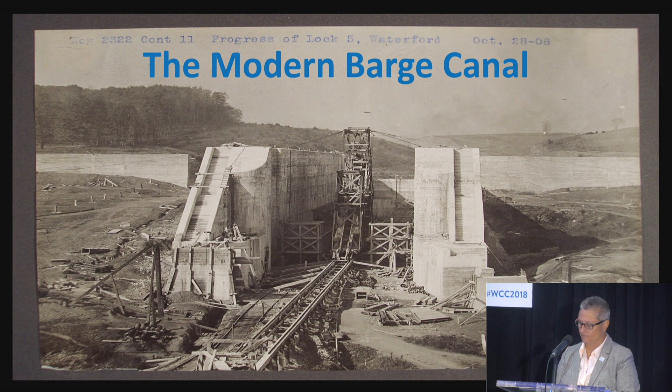The current New York State canal system is comprised of 4 canals, the primary leg being the Erie. Of the original lateral canals, only 3 remain in use today. This current system totals 843 kilometers of navigable New York State inland waterway.

The 57 locks on the New York State Canal system are 91.4 meters long, 13.3 meters wide, and additionally there are 19 lift bridges, 116 dams, 610 water impounding structures, 20 reservoirs, and over 193 kilometers of water impounding embankments. We have an extensive feeder system from those reservoirs for water management.

The New York State Canal system is also part of a network of waterways which stretches south to Florida, north to Canada, and west to the Great Lakes and Mississippi River. So as you can see, for over 200 years, the New York State Canal system has physically changed, adapting to increased commercial use for the economic benefit of the United States.

The peak of commercial shipping occurred in 1951, with over 5.2 million tons of cargo shipped. While there are limited commercial barge operations on the New York State Canal system today, the use has gradually shifted from commercial to recreational. The Canal Recreation Way Commission was created in 1992 to provide a vision for the future through the Canal Recreation Way Plan.

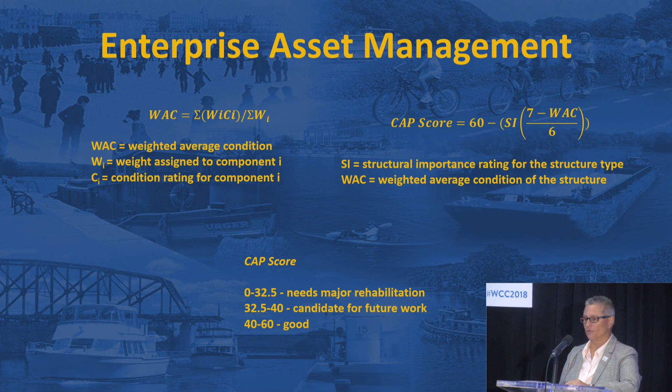Now, under the direction of the Power Authority, a second effort to reimagine is taking place. With the migration to Maximo, which is a configurable, off-the-shelf asset management system, we're now adding work history and historical spending, allowing our analysis on all our infrastructure to be more robust.

The newest development is the addition of a remotely operated vehicle and drone capability to our structural inspection program. That was my best effort at flying the drone. They don't let me touch it.

ROVs can enter spaces too hazardous or confined for inspectors, and the drone is being used with thermal imaging to detect leaks in earthen dams and embankments before those conditions cause a catastrophic failure. All of these changes are assisting our engineers and leaders make more informed, repeatable, and transparent decisions.

Finally, with regard to risk, we've embarked on an evaluation of our vessel fleet to retire older equipment which have significant environmental and safety risks and replace them with modern working vessels. 29 obsolete New York State Canal vessels are being repurposed as part of New York State's expansion of 12 artificial reefs. These vessels are being put into service one last time.

Their legacy will be represented by enhanced fisheries and diving opportunities for generations to come. To date, 7 vessels have been deployed off the coasts of Long Island, with an additional 6 to be deployed this month. This reimagining of decommissioned vessels is a win for vessel enthusiasts, the environment, and the economy.

I'm going to grab a short break here and have some water, or maybe some Irish whiskey, or maybe that's later. So here's a video about the expansion of New York State's artificial reefs with the Canal Corporation as a key partner.

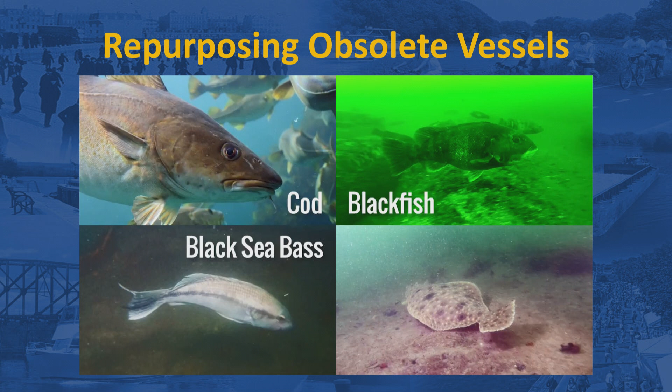It is also an alternative to recycling if you use the right materials. So it's a win-win-win. This ambitious program is providing vital habitat for fish like cod, blackfish, black sea bass, summer flounder, and lobster. New York's Reef Project is being managed by a multi-agency team comprising the New York State Department of Environmental Conservation, New York Power Authority, and the New York Canal Corporation, New York State Department of Transportation, and the New York State Thruway Authority.

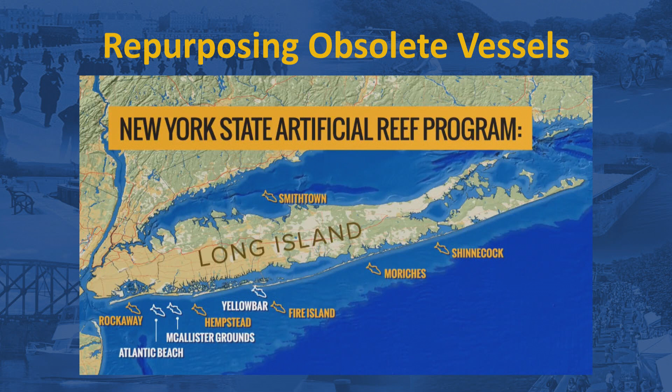We are building at 12 reef sites off the coast of Long Island. This summer, we are developing 6 of the reefs at Rockaway, Hempstead, Fire Island, Moriches, Shinnecock, and Smithtown. Next year, we'll be developing another 6 reefs at Atlantic Beach, McAllister Grounds, Yellowbar, Kismet, 12 Mile, and Matinecock.

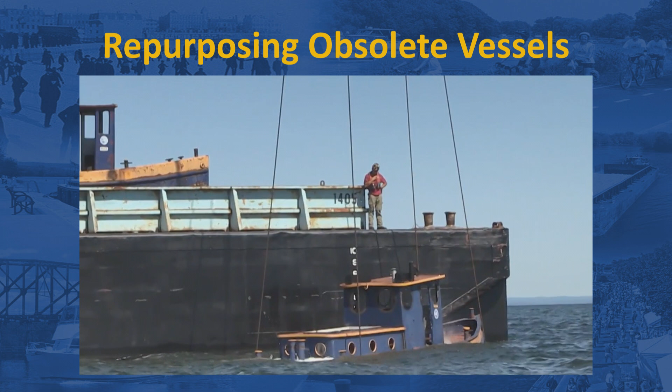We're building artificial reefs using a combination of recycled materials that enhance existing habitats, promote biodiversity, and ensure these marine environments continue to thrive. At each reef site, materials are strategically placed, utilizing the patch reef design, which creates smaller, isolated reef patches that are supported by sandy bottom. Before the structures are deployed, all harmful materials are removed, including oils, asbestos, pesticides, and loose debris.

One of the key factors of these reef projects is that they will generate benefits immediately, providing shelter and foraging areas for fish and other marine life. Reefs that have been put down have been colonized in as little as 2 weeks. Some studies have shown recreational fishermen have been able to take fish off of artificial reefs 2 weeks after their initial deployment.

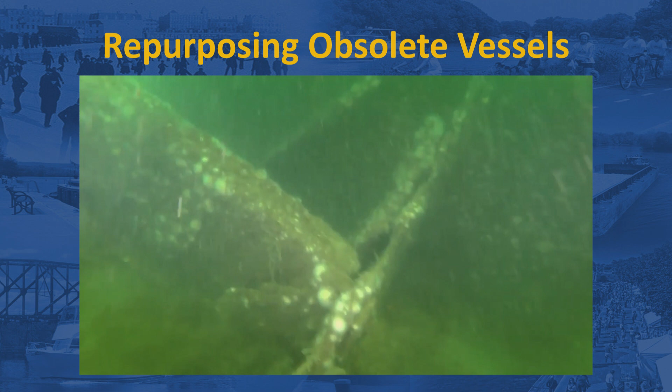These benefits will continue to grow over a 10 to 15-year period as the artificial structures become covered by encrusting organisms like barnacles, mussels, and sponges, creating habitats similar to a natural reef.

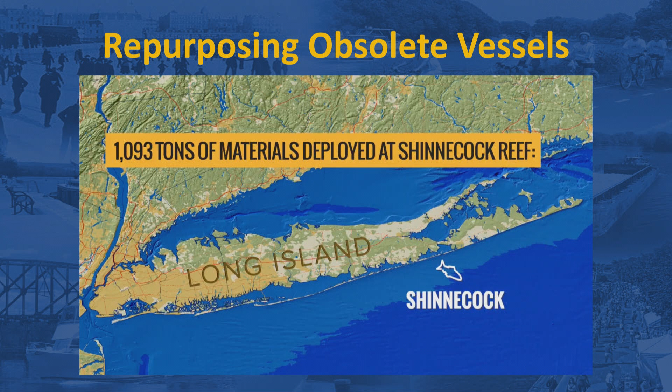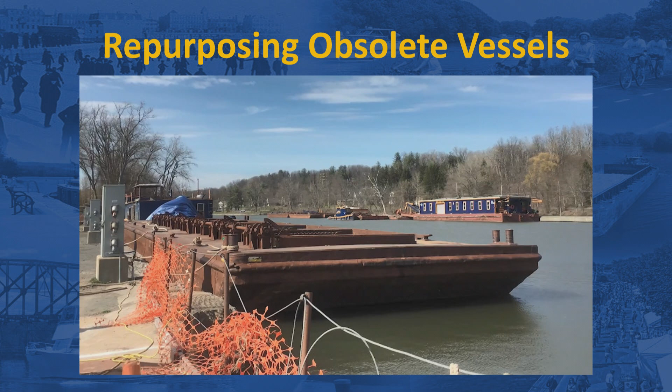On May 31st, Governor Cuomo led the inaugural event at Shinnecock Reef, where 1,093 tons of materials were deployed, including 885 tons of clean, recycled Tappan Zee Bridge steel trusses, roadway deck panels, and steel piles, plus 3 out-of-commission Canal vessels, including a 74-foot tugboat and 208 tons of steel construction materials. As this diving footage of the sunken tugboat shows, marine life, such as black sea bass, are already attracted to this new reef habitat.

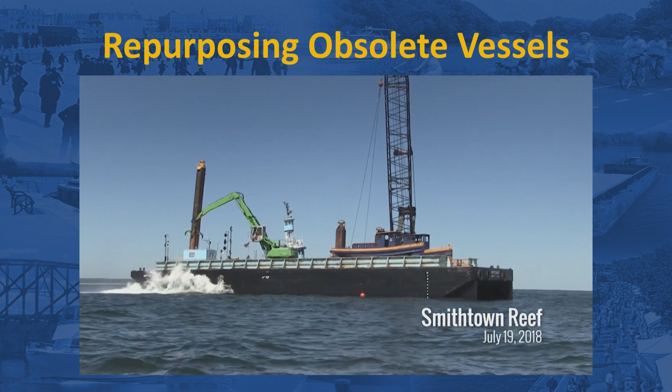More recently, we deployed materials to create a new habitat at Smithtown Reef in the Long Island Sound. Two 40-foot decommissioned canal vessels and 75 tons of recycled steel pipes were sunk at the 3-acre site, which lies 1.6 nautical miles northwest of Stony Brook Harbor entrance.

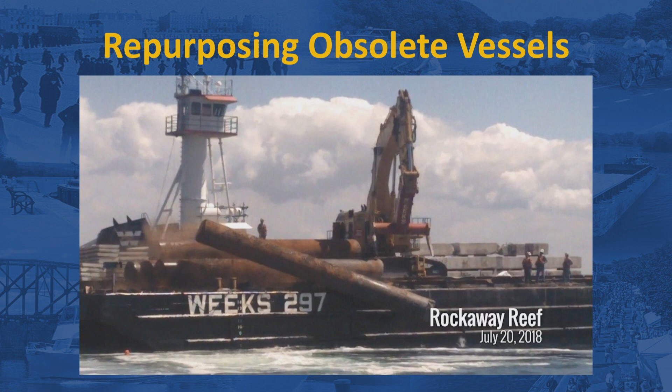We've begun developing Rockaway Reef, which received its first barge full of recycled Tappan Zee Bridge materials this July. More materials will be deployed there in August and September, including a 100-foot vessel.

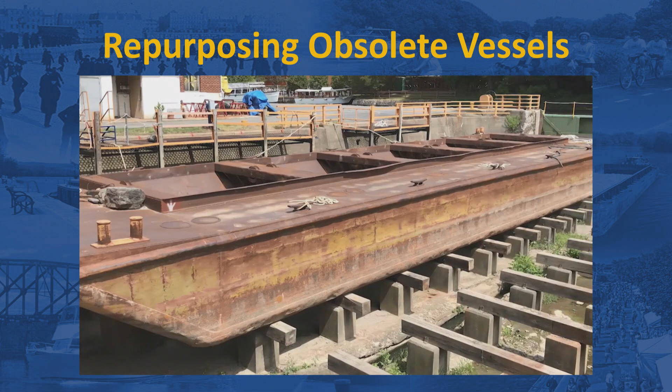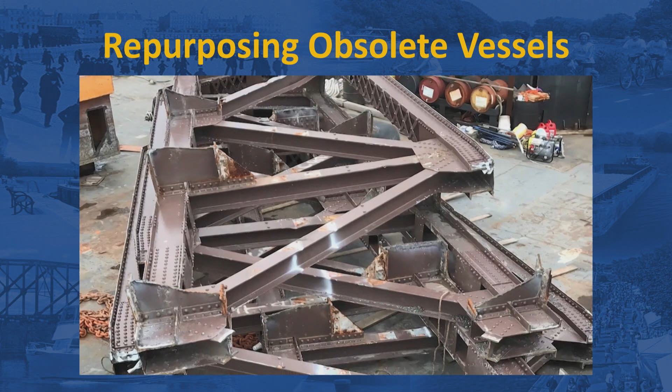Today, as part of our ongoing initiative to provide shelter for fish and other marine life off New York shores, we'll be developing Hempstead Reef with a variety of recycled materials: a 115-foot decommissioned derrick boat called Ward's Island, another 75-foot derrick boat, 2 large steel power plant turbines, 4 steel bridge trusses, and 2,380 tons of old Tappan Zee Bridge materials. This vast 744-acre reef is situated 3.3 nautical miles south of Jones Beach State Park, and it is 72 feet deep at its deepest point.

In June, a barge load of Tappan Zee Bridge materials was deployed at the reef, and 3 more barges of Tappan Zee materials will be deployed between now and September. Development of the Fire Island Reef and Moriches Reef will also take place at the end of the summer.

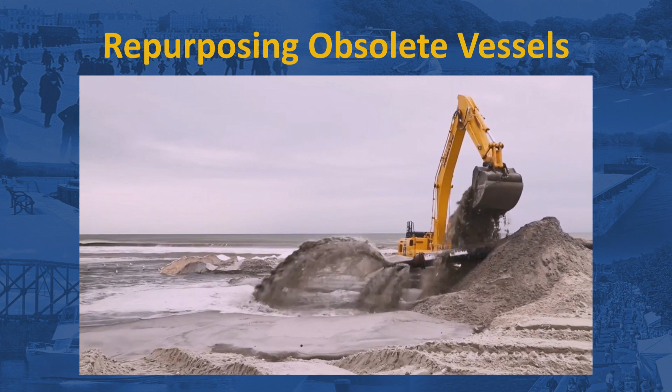New York is a national leader in taking on critical environmental challenges through funding for the Environmental Protection Fund and Clean Water Infrastructure Act, banning offshore drilling along New York's coastline, and reducing nitrogen discharges into Long Island's Western Bay, as well as leading efforts to combat climate change and strengthen shoreline resiliency. We are committed to building a brighter, more sustainable future for all.

Our innovative reef building program is an investment in a stronger, more diverse marine ecosystem that will boost Long Island's recreational, sport fishing, and diving industries, as well as the regional economy. New York's always led the way. We will lead the way once again. And the proverb that says it all to me always: we did not inherit the earth from our parents, we are borrowing it from our children.

So the reef expansion is a great segue to my final topic, climate change. Regardless of what you may personally believe about climate change, I can tell you that in New York State, our storms are increasing in severity. The recent storms we've had certainly caused us to restore, regenerate, and reimagine.

In 2006 and 2011, the New York State Canal system experienced significant infrastructure damage from extreme weather events. Each time, we worked tirelessly to restore navigation and rebuild using resilient and innovative approaches. In 2006, during the 6-day period from June 25th to June 30th, approximately 25.4 centimeters of rain fell in portions of the Mohawk River Basin.

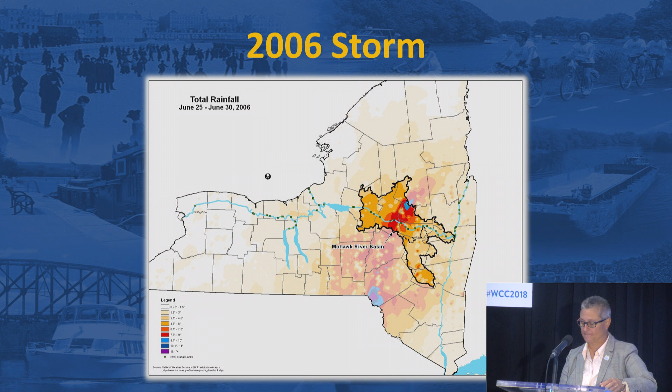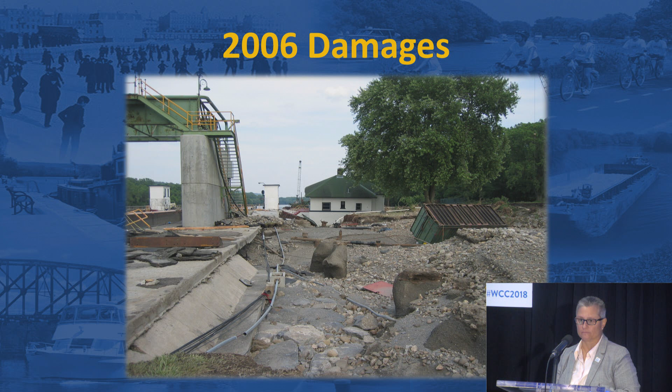This is at Lock 15 on the Erie Canal. The roof in the foreground was from the maintenance shed that was completely washed away, and the vessel in the background was washed up onto the roadway. It required 2 large cranes to put it back in the water. This vessel weighs approximately 75 tons. It was moored on the approach wall to the lock, which is over 60 meters from this road.

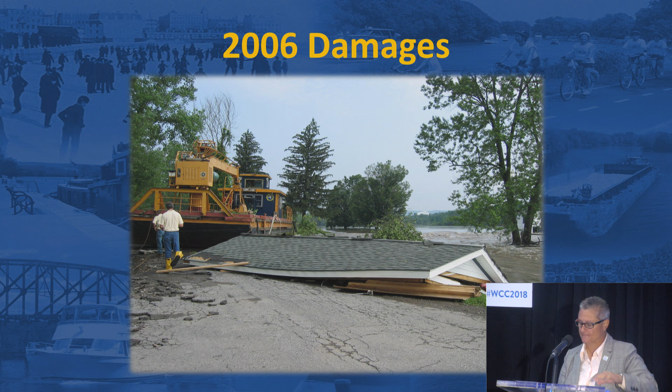So here's some of the restoration photos for that 2006 event.

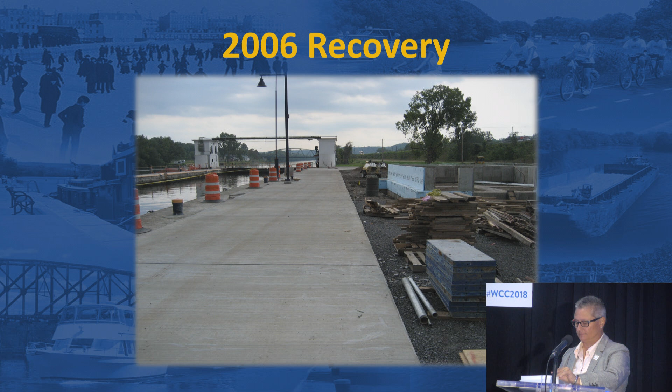We also had a small fire in a facility further west, and at that point we were wondering if the locusts were going to come. So we thought recovery at that point was achievable in a really short time frame. Then Tropical Storm Lee impacted the same watershed on September 7th, 3 days after the tornado, delivering another 25.4 centimeters of rain over a 10-day period.

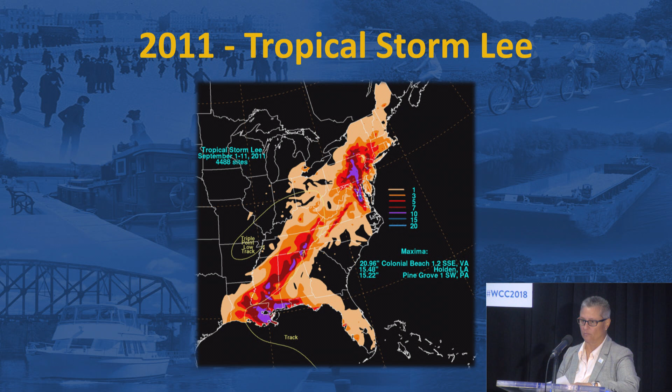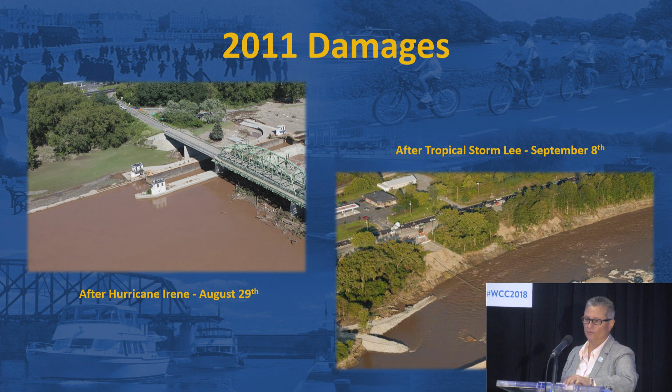So this is the north end of the movable dam at Lock 9. The photo on the left is following the initial hurricane that came through, and you can see the roadway approach to the bridge is intact. Then in the photo on the right, after the second storm 9 days later, the roadway approach was washed away. The bridge is still standing, and the lock is still standing, but all of the surrounding area is gone.

Here's some additional photos at Lock 9.

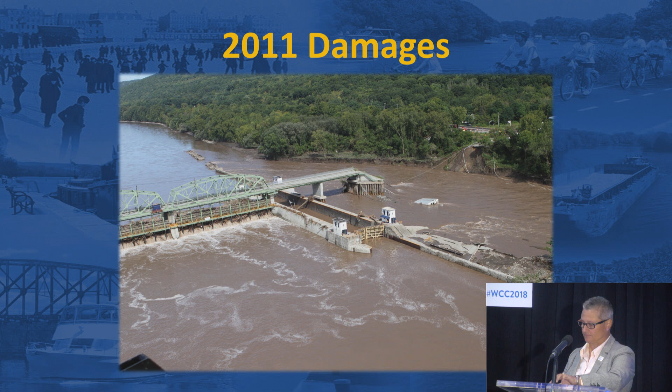Thankfully, at this bridge, the abutment, wing walls, and pier were on piles. And you can see they're completely exposed. You're never supposed to see a picture like this. They're always supposed to be underground, never to be seen again.

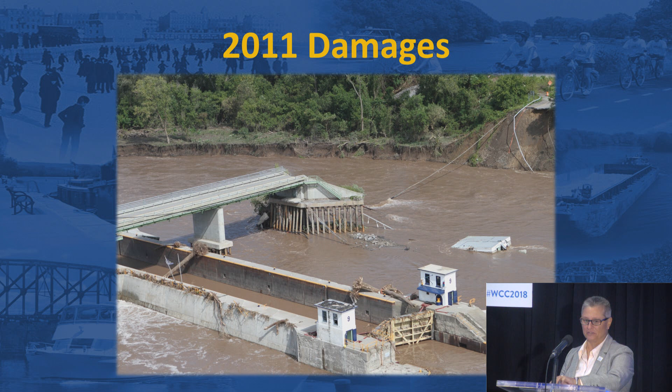We also had extensive damage to utilities during the two events. This is from Lock 10. Much of the superstructure of the dam was destroyed from the forces exerted by the debris field on the chains, which we'll talk about later. You can see the bent floor beams in spans 1 and 2.

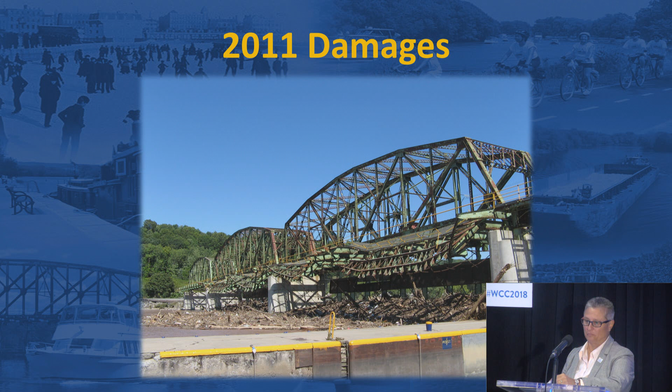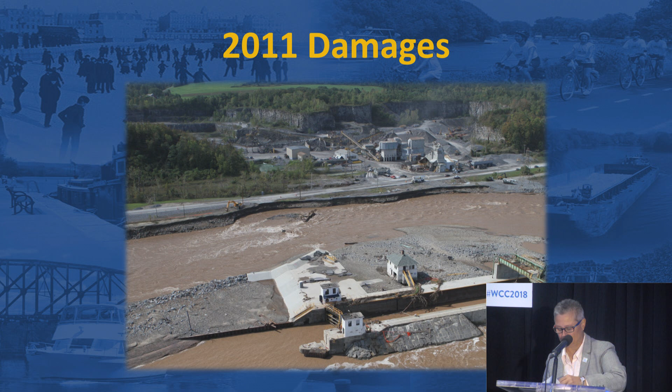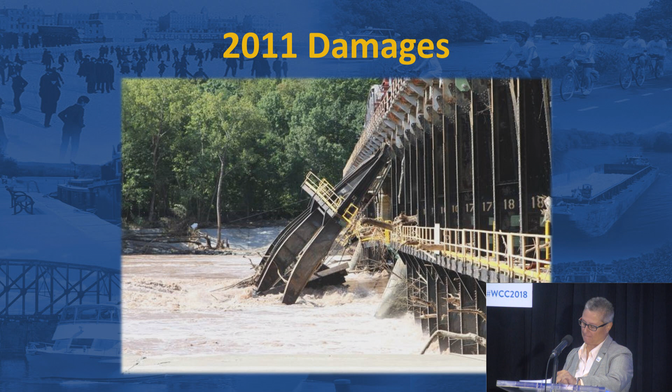And here's an aerial view of Lock 11, where historic Guy Park Manor was partially destroyed. On the right, you can see the foundation of the washed-away lock house.

So we had quite a bit of restoration to do after 2011.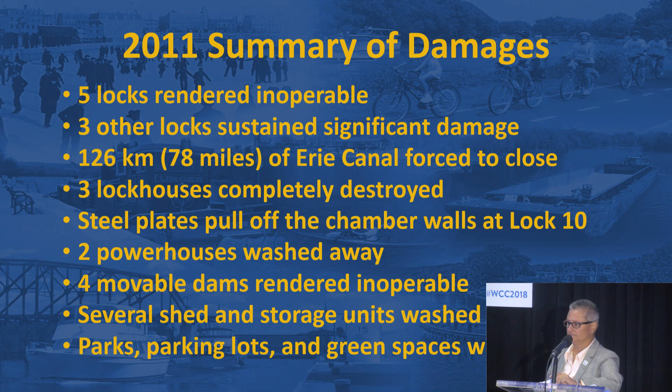The public expects the New York State canal system to be open, safe, and reliable. Through significant efforts by canal staff and external contractors, the waterway was reopened in record time following these devastating events. But we needed to do better. The status quo was no longer acceptable, and we needed to look for opportunities for improvement. A significant change in operational thinking was needed to lessen the impacts of these events, which had now become the new normal.

Canal leadership looked at two areas which, with significant investment and wholesale changes to operations, could provide long-term flood mitigation to not only benefit the canal system, but also adjacent property owners and communities. We decided water levels needed to be proactively lowered in advance of a predicted storm, and that we needed better predictive capability.

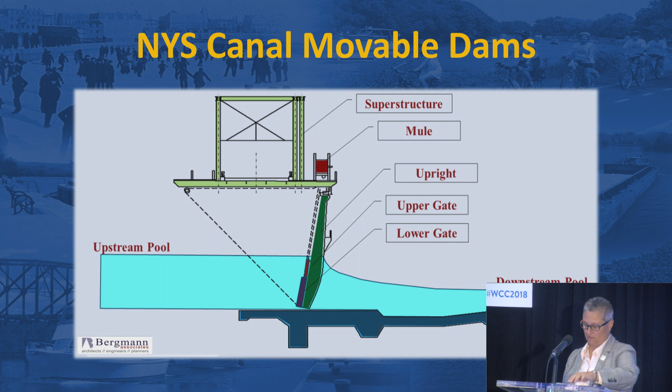Traditionally, the uprights were installed at the beginning of the season and left in place until their removal at the end of the season. So this animation shows how the components work together.

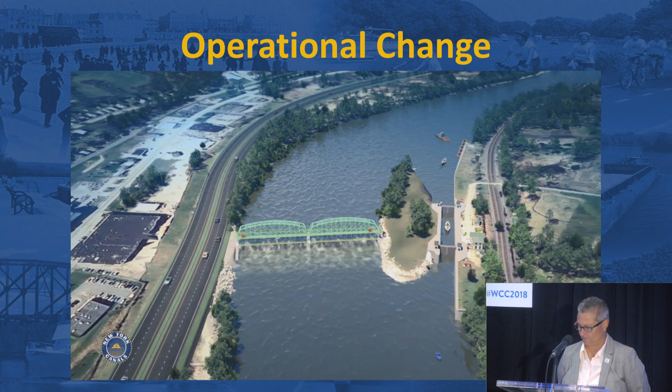So this is a flyover of the dam at Lock 14 on the Erie Canal. I want to thank Bergmann Associates for putting this together.

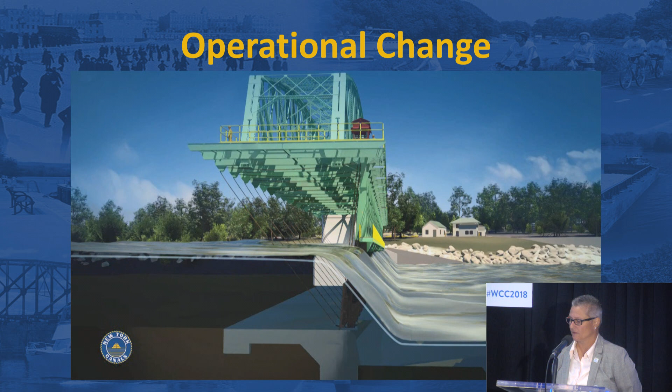So here you get a cutaway of the dam. You'll see the upper gates go up, the lower gates go up, and the water levels equalize. Now the uprights are being pulled as pairs. So that's essentially how the dam goes from navigation season to non-navigation season.

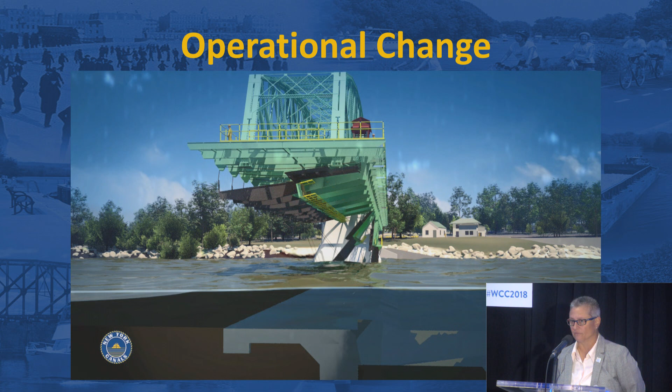So in order to mitigate these conditions, the Canal Corporation decided the gates and uprights would need to be removed on demand during the navigation season. We had anecdotal evidence indicating that they couldn't be removed and that they would be damaged during that operation. So we tried to validate those anecdotes, and we did a controlled test, and we broke the dam.

We put it back together. We learned a lot from the experience. Our structural engineers put a lot of gauges on there and analyzed all that data to come up with how we can meet our goals of taking this out mid-season.

So a $28 million FEMA mitigation grant was approved to replace the uprights using more robust steel, replacing gate rollers with low-friction bearings, and replacing mule components. We also added lighting for safer nighttime operation.

Operational procedures were developed to initiate the upright removal with a forecast of a 10-year or greater storm event. The hydraulic modeling that was done indicated that a reduction of flood levels would be as much as 2.3 meters by doing this operation.

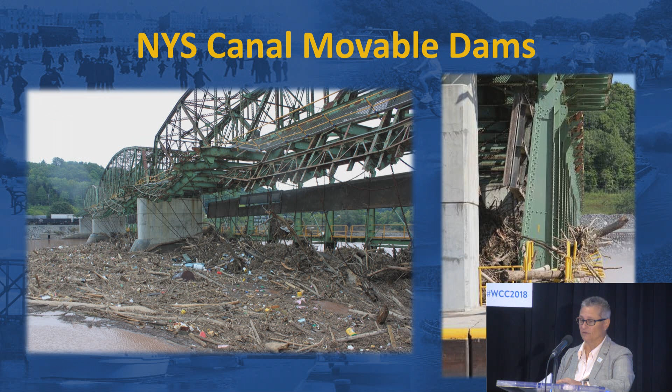The other area we decided needed change was the need for better forecasting. We received another $8.5 million FEMA grant for a proposal to develop and implement a canal flood warning and optimization system. This effort would add additional stream, stage, and precipitation gauges, filling the existing gaps, and developing a web-based tool to provide situational awareness for the canal system.

This tool includes 3 river basins covering over 33,000 square kilometers in upstate New York. The tool includes early warning of flood inundation areas and peak flood timing. In this next video, you'll see the inundation from Hurricane Irene, which occurred in 2011, which we're using to validate and revise our models.

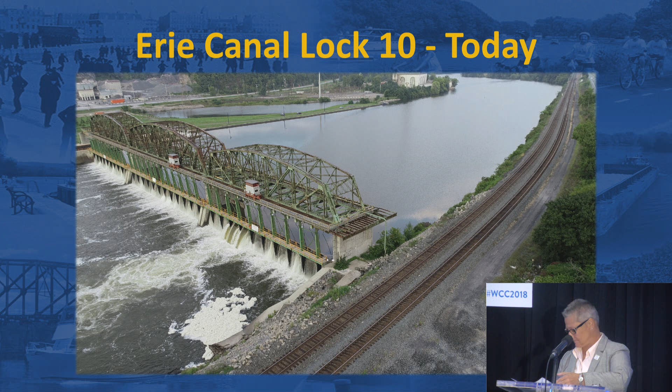In addition to real-time awareness, the system has forecasting components to allow emergency managers to proactively protect their communities. This will assist in managing evacuations if necessary by showing which areas need evacuation and which don't, what access routes may become usable or reusable over the duration of an event, what facilities may become inaccessible or reaccessible, such as schools, hospitals, or shelters, and the timing associated with any of those actions.

At the beginning of this presentation on the timeline, you may have noticed a topic I didn't discuss. At last year's conference, we announced a $2.5 million competition to reimagine the canals. This is an exciting time for New York's canals as we embark on yet another transformation. I'm going to keep you in suspense, so make sure you attend the closing session of this conference later this week when my colleague Sheridan will have more detail about that competition.

The stewards of the New York State Canal System have always been focused on sustainability. The staff at the New York State Canal Corporation all deserve my sincerest thanks. They are the folks who work hard to make a difference.

2. 1, 2, 2. Mic check. 1, 2.